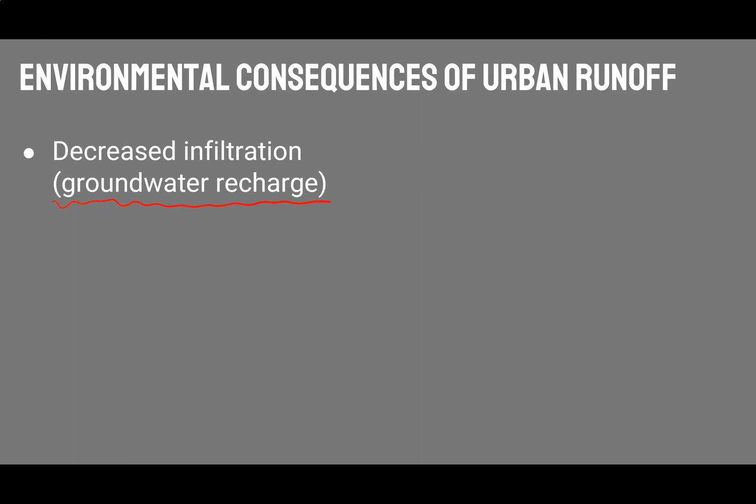So let's see. What are some environmental consequences of this urban runoff? Well, if the water runs off, that means it does not infiltrate. And if it does not infiltrate, it cannot get back into the ground. Now, running off into the ocean is great, and it's going to possibly evaporate and turn into clouds and rain. But the key is getting it back into the ground. And if it doesn't do this, groundwater supplies are going to be in bad shape. So you can see here, that's bad.

Rain washes pollution also from the streets into these things called storm drains, which could eventually bring that water back into local waterways. And if you look at those grates in the street, sometimes they'll be labeled with, this enters an active waterway or something. So, always be careful with what goes down that drain.

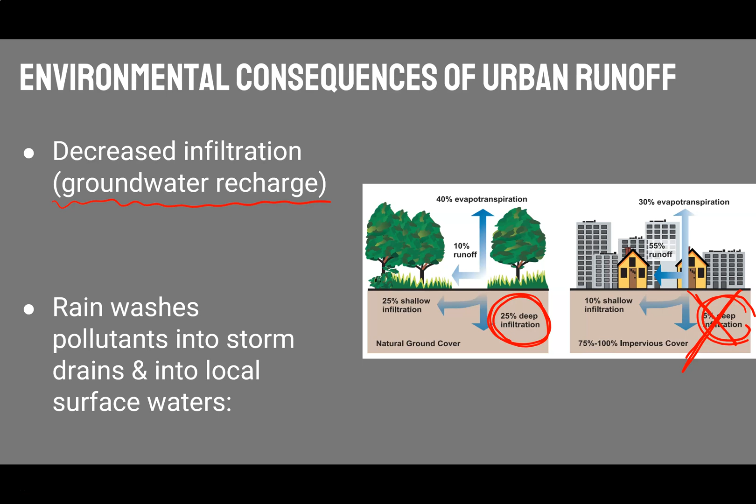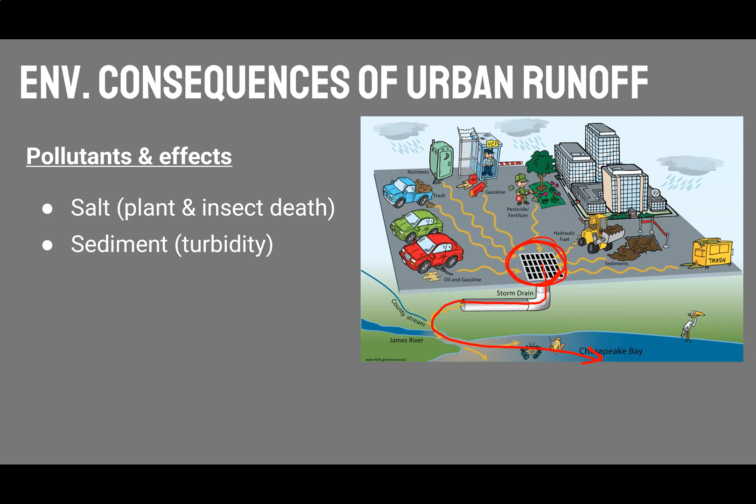So pollution and its effects: salt from the roads when we put it on there to prevent icing, that can get into the ground and cause plant and insect death. And once again, here's that grate I was telling you about. So all the water goes into that, goes into what's called a storm drain, and eventually makes its way back into a larger body of water. Sediment, turbidity: if dirt ends up washing in there, that could cause waterways to get clogged up. Boats will also hit the bottom if it's too shallow.

Fertilizer, eutrophication, we know all about that. And pesticides. Pesticides wash down the drain. They may begin to kill non-target species. And again, that's bad, messing up the whole entire food web/food chain. And oil and gasoline, when that gets in there, that can sit on the top of the water. It can suffocate fish and kill aquatic insects. Again, messing up the food webs and food chains of the local waterways.

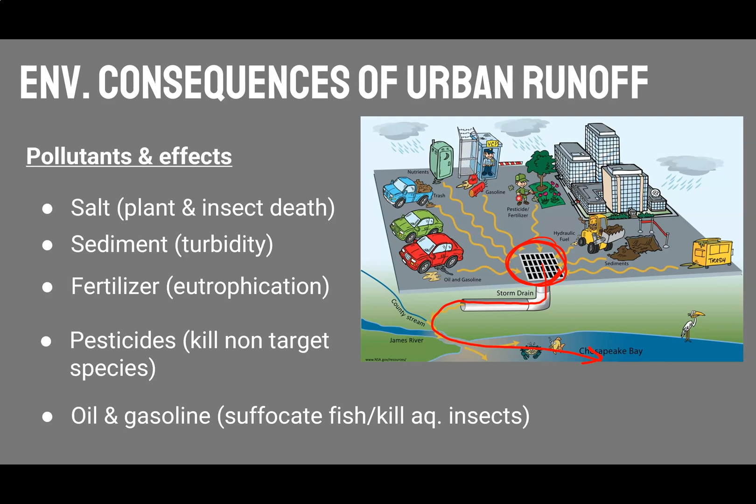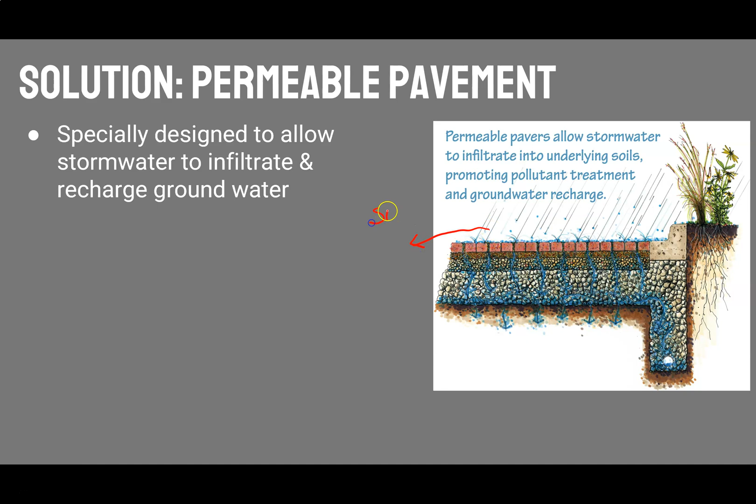So, a couple of solutions. One is called permeable pavement, and we spoke a little bit about it earlier. But this is designed to allow water to get in. Now, some will run off, of course. Some will. So I don't want you to think that it's perfect. But a lot can get in and ultimately get collected.

And that's the key. So if you can decrease the runoff, that means you're going to decrease pollutants and other pesticides and herbicides and all this other stuff from washing into our local waterways. And it can get into the ground. And again, the ground is a giant filter. And the dirt will filter all of those bad things out before it gets to the water or the groundwater.

And it will also decrease the likelihood of flooding. Because if you have all this urban cement and it rains like crazy, water has to go somewhere and it could flood, especially things like the subways. Unfortunately, it does cost a couple extra bucks, but in the long run, it could be worth it.

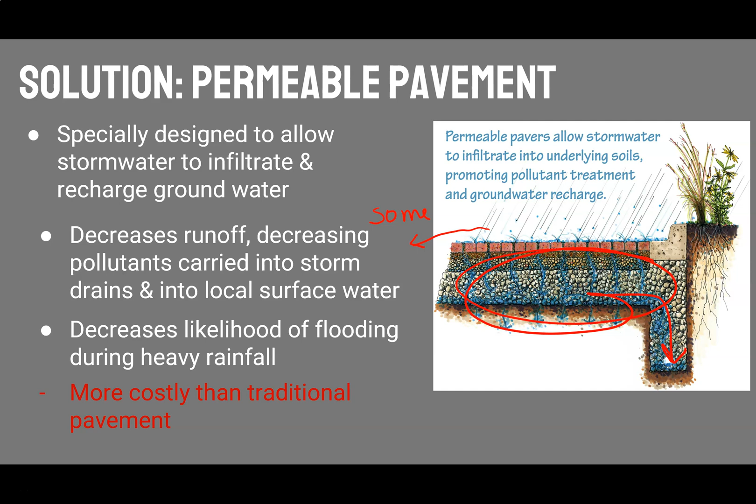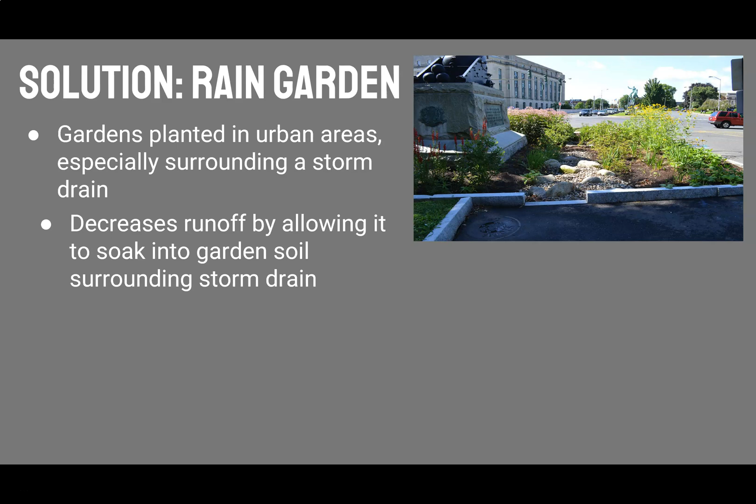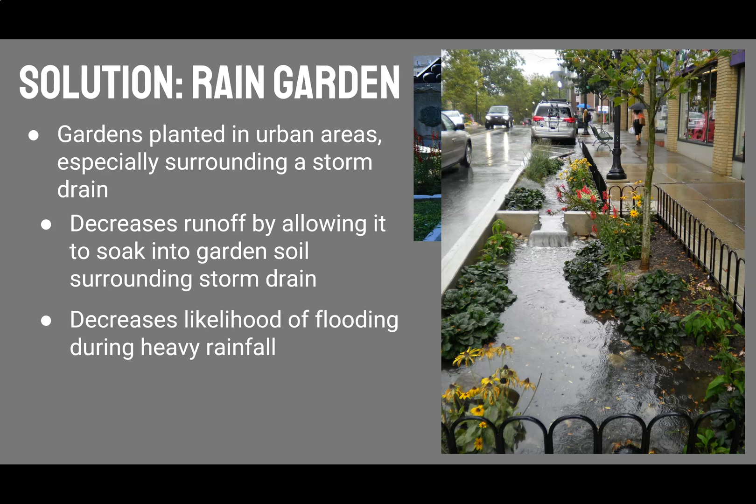Something called a rain garden. These have also popped up in a lot of urban areas, and basically they are a nice little garden, maybe planted in the middle of a parking lot. And it is just a way to catch some of the water. And once again, if there's dirt underneath it, the dirt will act like a natural filter. So it will decrease the runoff and increase infiltration. And it will decrease the likelihood of flooding during a heavy rain.

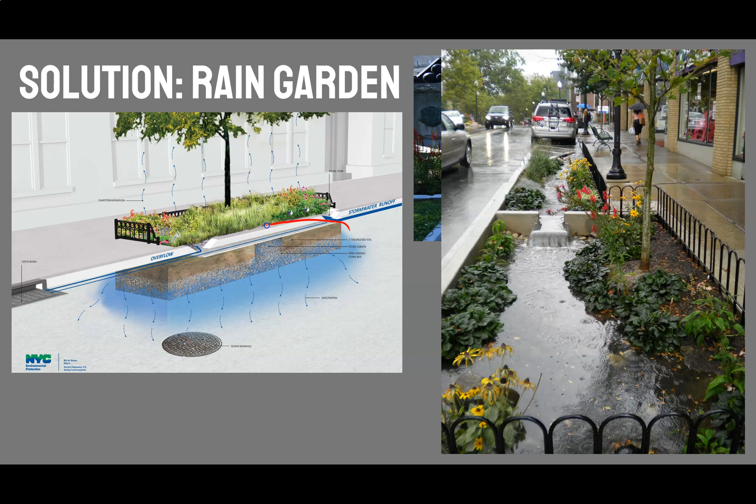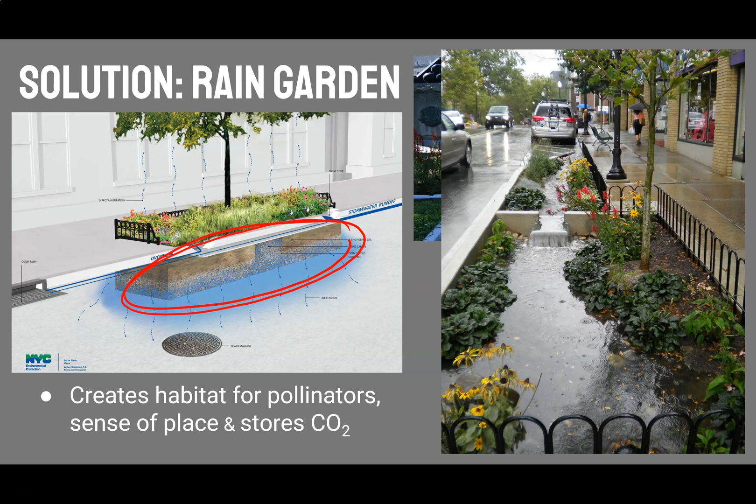Here's one just kind of on the sidewalk. And again, you can see there's a pretty serious amount of stuff underneath it. It's not just dirt. So there's a lot going on underneath there. And it also creates a habitat for bugs and things like pollinators to help further the pollination of plants, things like bees.

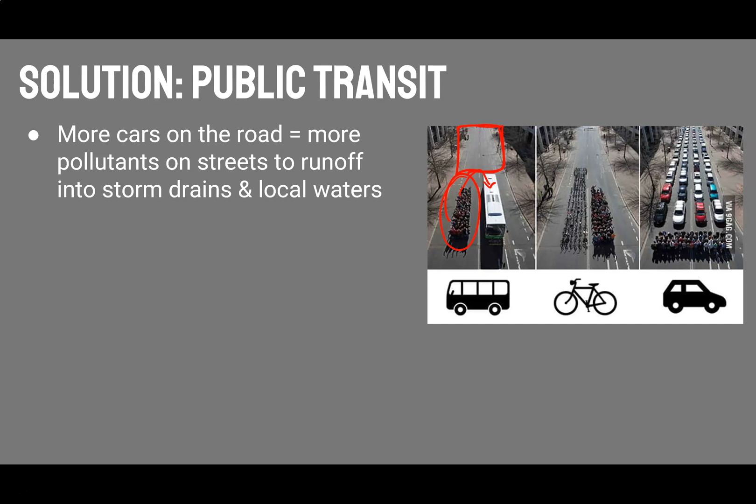Public transit. If you can take a bus or a train, this many people can fit on that bus, clearing up all of that street from traffic, and also a lot less pollution. Riding a bike can also save all that pollution. If you take a car, that is traffic and pollution and more need for roads. More motor oil, more tire pieces, gasoline, antifreeze, and that leaks out of your radiator. All of these things can cause pollution and harm to the ecosystem.

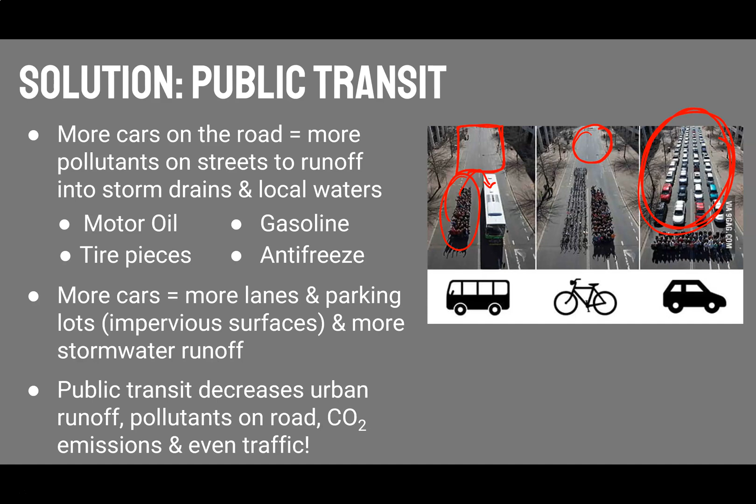Again, more cars, more lanes, more parking lots, more impervious surfaces, more runoff. Public transit will help you decrease all of that, hopefully decrease pollution and also lower CO2 emissions, because instead of every single car burning fossil fuels, it's just one vehicle. And this is, again, a pretty interesting kind of graphic there. So if all the people get on the bus, then there's a lot less traffic on the streets.

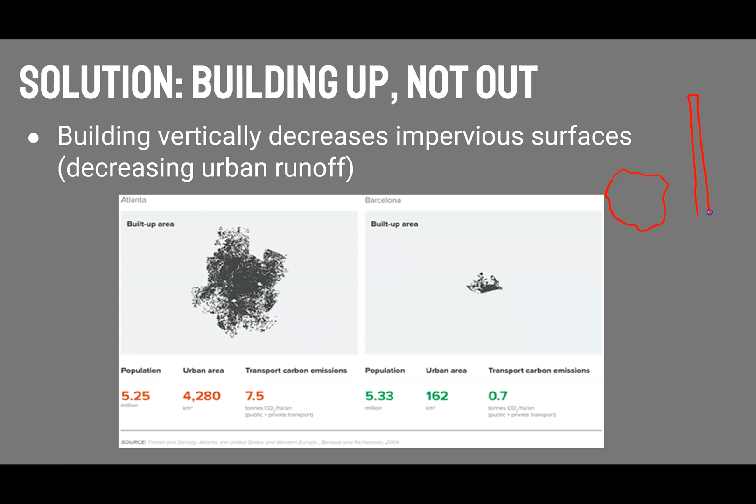Another one a lot of people don't think about is building up, not out. So for example, if you have a large city that takes up this much area, or homes or whatever, or you can build up. Up has such a smaller footprint. So you can see here that this is a very large area. Here, it's a very small area. That leaves all of this to be undeveloped, or less roads, less parking lots, things like that.

And that is Atlanta versus Barcelona. And they're about the same population, plus or minus. And you can see that urban area is way, way, way less, because building up is better than building out. And also less need for cars, less carbon emissions.

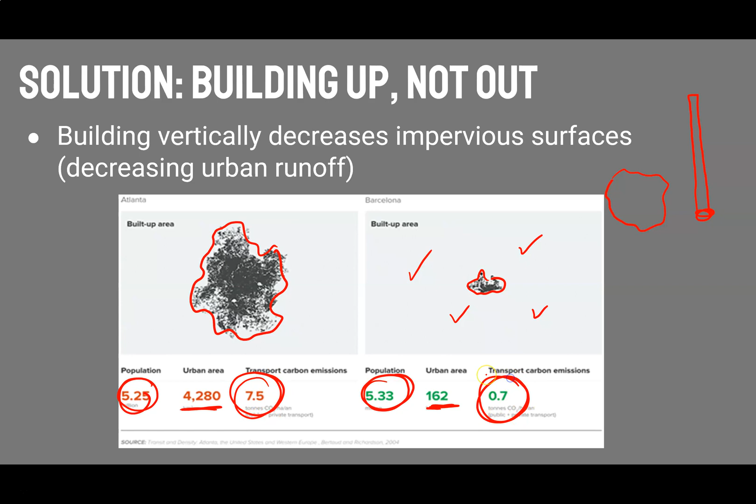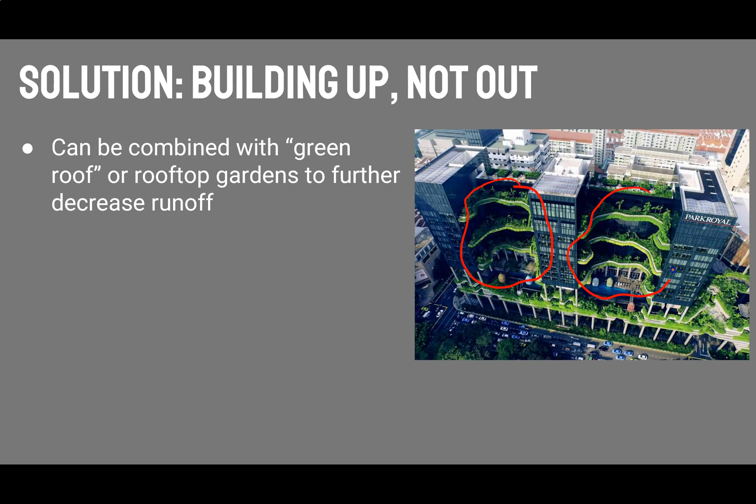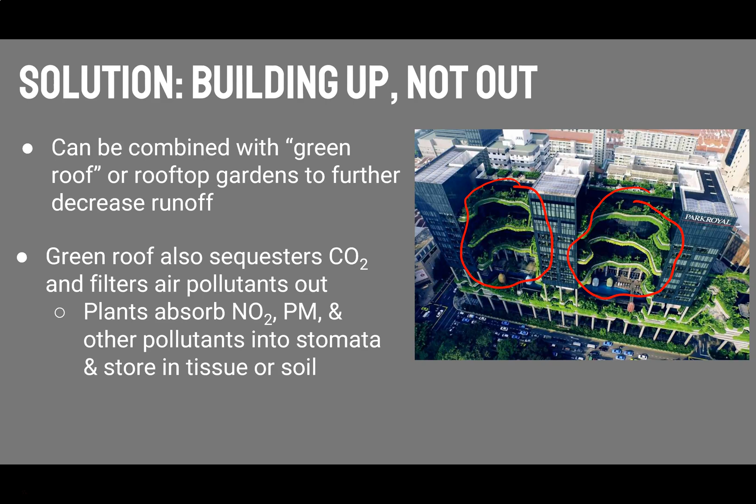You can also combine this with what are called green rooftops. Now, this is extremely expensive, and it is extremely cutting edge, if you will. But you can see here there are tiered green areas within a building. So that's going to help reduce runoff. And also, all of those plants will help sequester that CO2, which we talked about, and ultimately help filter the air from things like NO2, particulate matter, and other harmful asthma-causing pollutants.